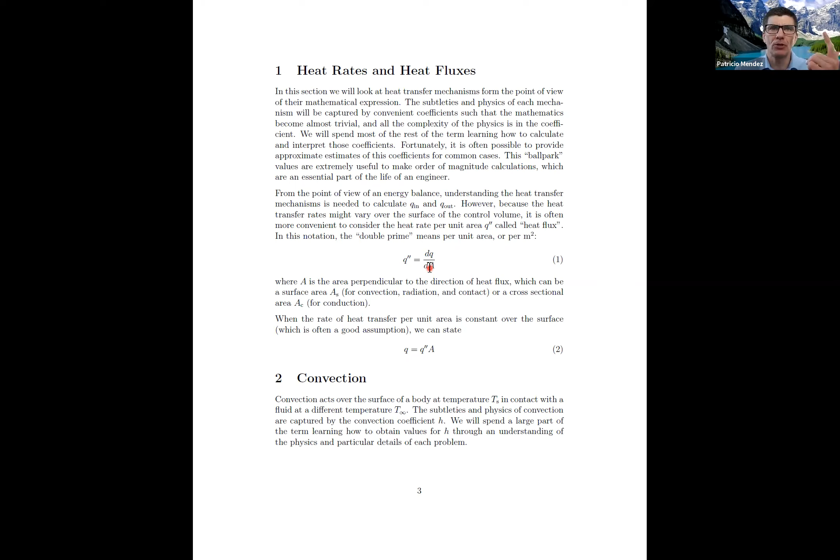Okay, so about heat transfer mechanisms. Here we go. As a quick review of what we saw on Monday, we said that in addition to the big Q, that is thermal energy in joules, and the small q, that is thermal energy in watts, an energy rate, we now have this small q double prime that is a heat flux, and the heat flux can go out of a surface, through a surface, right? And in that case, we call that surface A_s, a surface area, or it can go through a cross section of the body, through the inside. That is a case of conduction, and in that case we call it A_c.

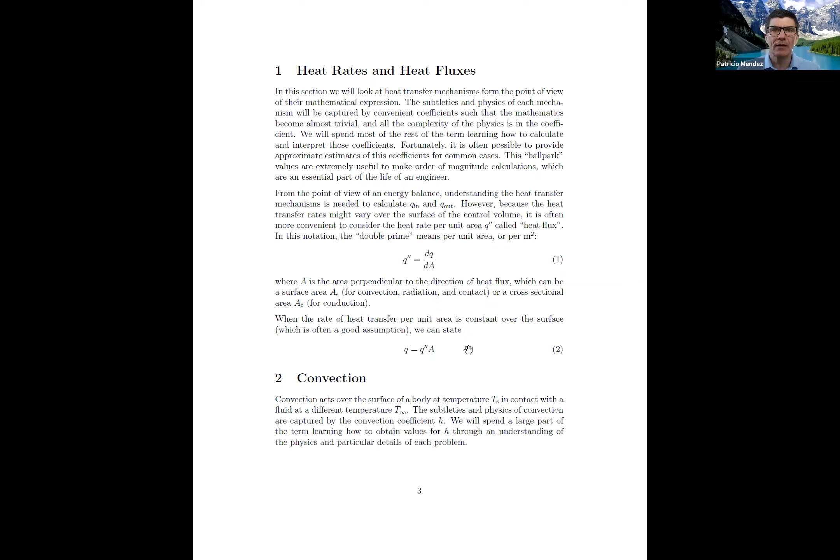And because this is a differential expression, to get a total amount of heat, we would need to integrate over the surface we care about. But for the most part in this class, not always, if we pick the control volume smartly over surfaces that have the same heat flux or the same temperature, very often we can say that the heat flux is constant over that surface, and the integral turns just into heat flux times area. Then we said, okay, what is the expression of heat flux for the case of convection?

And we came up with this formula that mathematically is essentially trivial, but it's extremely powerful. Just as energy balances look trivial, but last Monday during the seminar, it was not trivial at all. Now we see formulas that look trivial, but they summarize 200 years of research worldwide on heat transfer. And you're getting this crammed into 13 weeks, right? So don't be fooled by the simplicity. People thought about this very much before saying it.

So we said the key thing here is that the heat transferred by convection is proportional to the temperature difference between the surface temperature and the temperature of the fluid away from the surface. And this constant of proportionality is h, our heat transfer coefficient. Something interesting here, we are not saying exactly what the physics are for this to happen. We're just saying whatever the physics are, the heat transfer by convection is proportional to the temperature difference between surface and fluid. And the way I define it, it's always positive. So if it is a Q in, Q convection will be positive going in, and if it is a Q out, Q convection will be positive but going out.

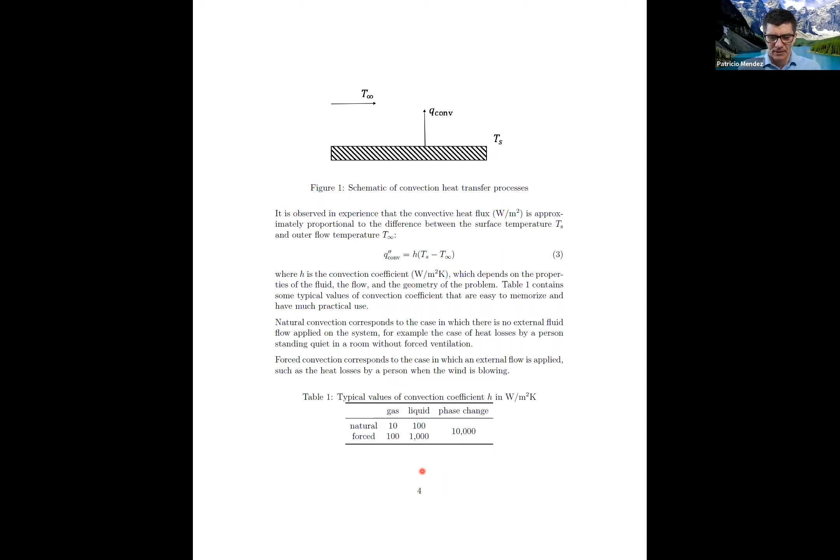We did a simple calculation that is a ridiculously simple calculation. Please be familiar with how to make this calculation, because this is what you're going to be doing. Next time you write an energy balance and you say, okay, what is Q in or what is Q out? And Q in or Q out might be by convection. And you will use this equation you saw here.

Then we saw radiation. That is a completely different physics. The equation of radiation is at the beginning of the birth of quantum mechanics. It's crazy stuff. But for us, we're not going to do quantum mechanics. We're just going to know that it has a formula in which the heat flux is epsilon sigma T surface to the 4 minus T surrounding to the 4. And for radiation, and only for radiation, we must use Kelvin.

For convection or conduction, we can use Kelvin, we can use Celsius, whatever we want. The result will not change. For radiation, it will change. And the reason is convection or conduction are always delta temperatures, relative changes in temperature. But in radiation, we have temperature to the 4, right? It's not a delta T to the 4. No, it's absolute temperature to the 4 of the surface and the surrounding temperature to the 4.

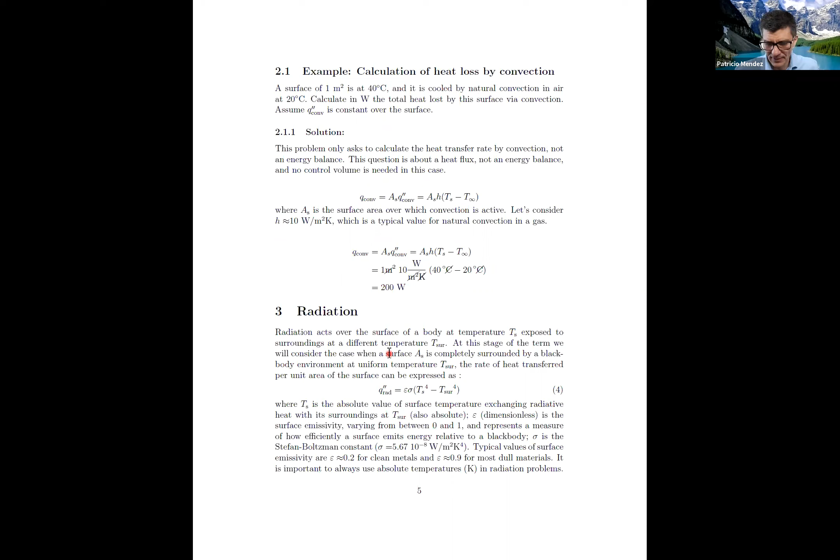You might need perhaps a refresher on this, or maybe you remember this and you think this is obvious. But the cool thing is that this exact equation we had before has this equivalent in which I'm expanding this difference of squares, and it ends up looking like this. This is exact. This is not an approximation.

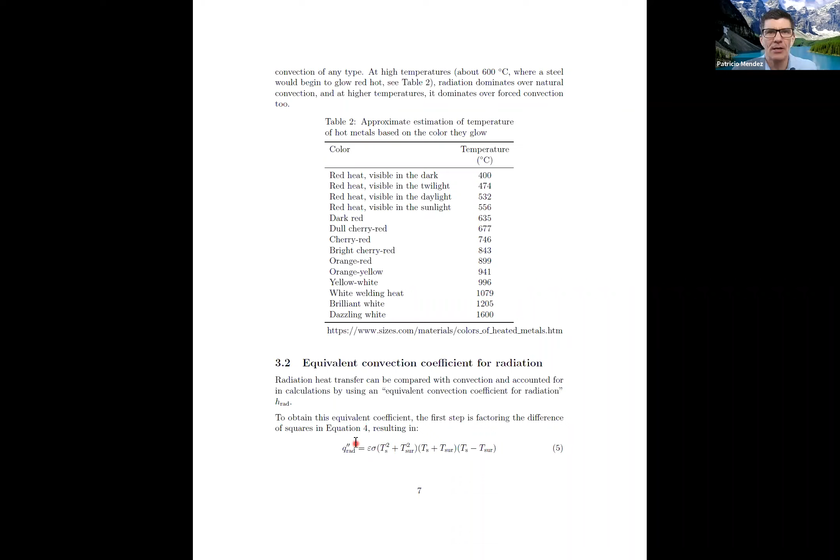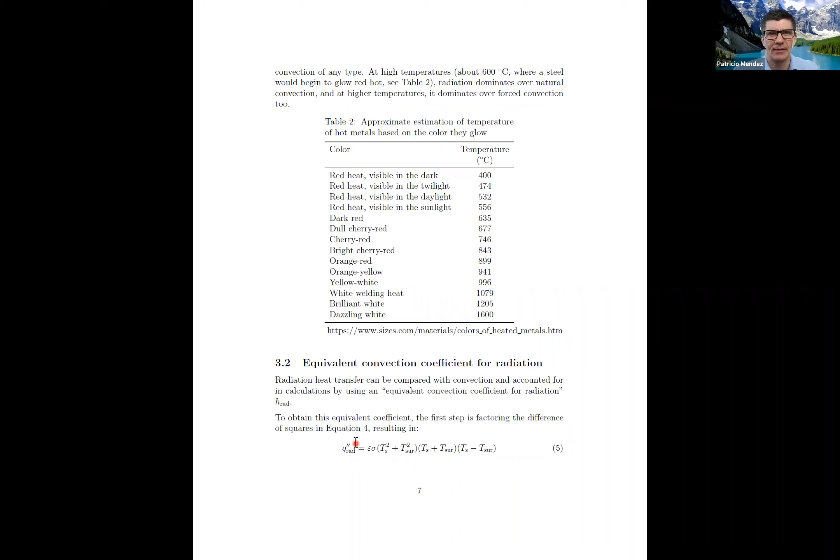What is interesting in this expansion is that it ends up having a term that is a delta T, temperature of the surface minus temperature of the surroundings. It has something in the front, but the fact that it has this delta T, saying no delta T, no heat flux by radiation, bigger delta T, bigger heat flux by radiation, means that it's somewhat similar to the equation we had seen for convection. The physics are nothing at all like it. But in the math, we see that there is some similarity in the expression.

And we can take that similarity to our advantage, because then we can say Q, the heat flux by radiation, we can call that whole chunk before the delta T H radiation. And that would be an equivalent convection coefficient for radiation. By equivalent, I mean it's not convection. Of course, it's not convection. But from the point of view of the math, it looks very much like convection. And the expression of this H radiation is this one that we can calculate having the epsilon, the sigma, the T of the surface and the T of the surroundings.

Of course, in convection, the convection coefficient is more or less constant with temperature. Not exactly constant. We'll see exactly how it varies later, but it doesn't vary very much. The equivalent convection coefficient for radiation depends very much on the temperature. Check it out. We have it here. So when we do this, it's mathematically exact, except that the H radiation changes quite a bit.

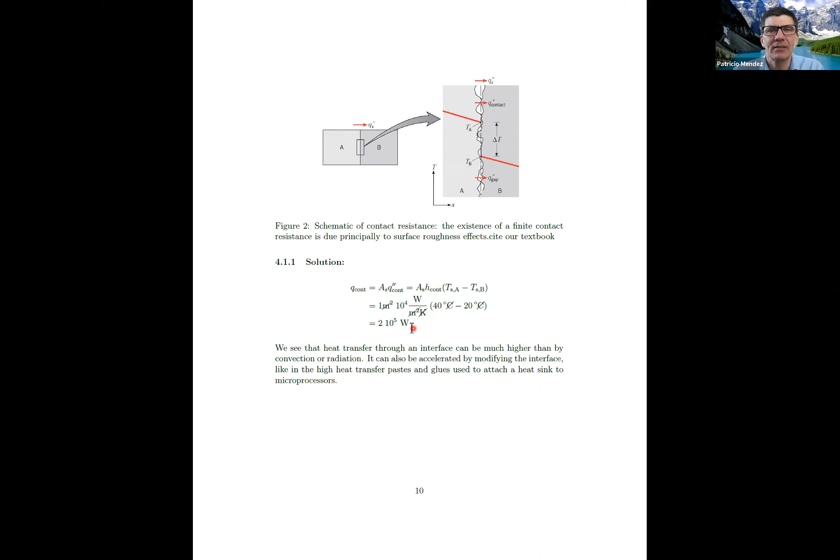If you remember when we did the heat exchange by radiation or by convection, we got things of the order of 100 watts. 200 watts for convection, about 100 watts for radiation. And then the heat flux under contact is 200,000, 1,000 times faster. Right? To keep in mind the order of magnitude of the things we're talking about. Exchange through surfaces is kind of slow, and exchange through these solid to solid contact interfaces tends to be quite high.

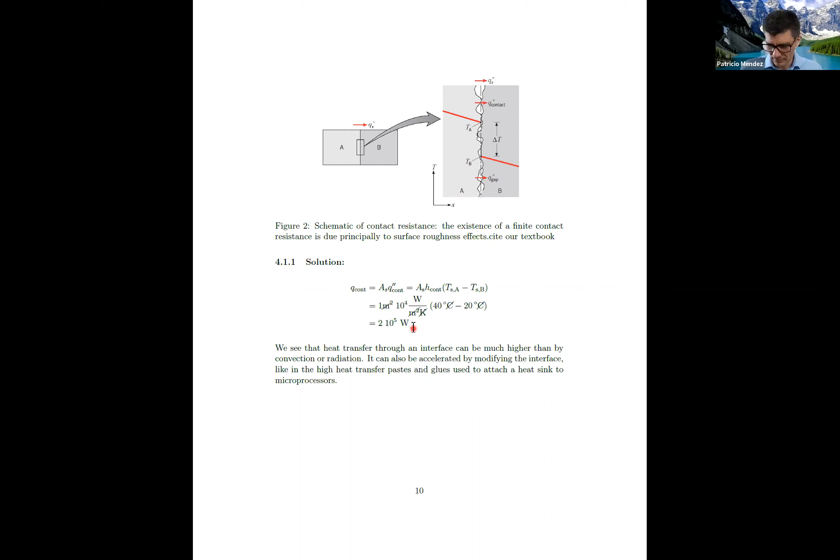All right, and now we get into something that will be the topic of the next few weeks. After seeing convection, radiation, and contact resistance, the first two I'm sure you heard before. Contact resistance, probably you haven't heard of, but has the same formulas. So we got those. We are going to talk about conduction. And conduction is a completely different animal,

because convection, radiation, contact resistance, all of those are associated with external surfaces, with surfaces going around the body. But conduction is inside a body. And the surfaces we're going to be talking about are cross-sectional surfaces, not outer surfaces. And people saw something empirically, which we call Fourier's law.

And what people saw is this: the heat transferred by conduction, let's say we have a wall such as this, one side of the wall is at high temperature, the other side of the wall is at lower temperature. The amount of heat transferred by conduction is proportional to the cross-sectional area. The cross-sectional area in this case is all the area of the wall because the heat is flowing across the wall.

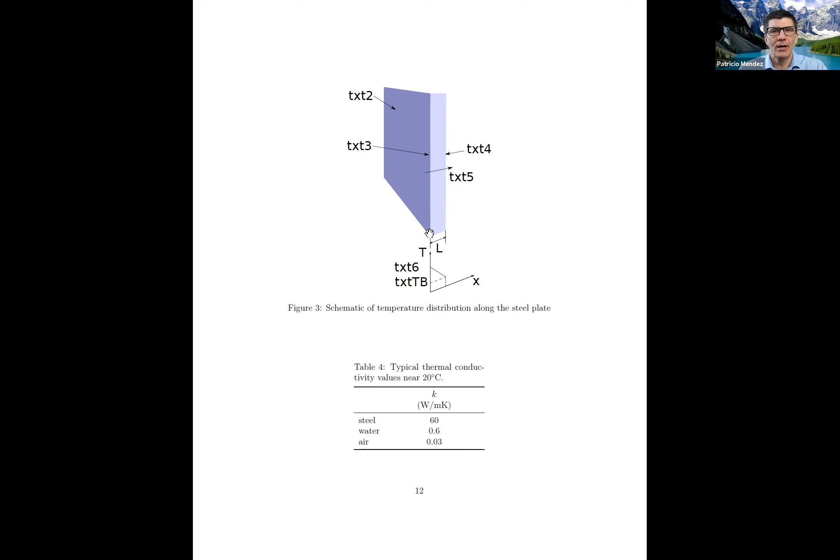And in addition, what people saw empirically is that this heat flux is inversely proportional to the thickness of the wall. Something you know, because a thicker jacket loses less heat to the winter air than a thinner jacket, right? L in this case is thickness. Higher L means lower heat losses by conduction. Much like everything else in this class, you knew this, but we are putting it together in a way in which we can make predictions that go way beyond intuition.

So let's see. The way we express this is we turn the delta T into a differential of temperature. We turn the thickness of the wall into something very thin, a differential of X. And the heat per unit area becomes a heat flux. And this equation, equation 10, turns into this expression here that is called Fourier's law.

Now we replace the proportional symbol with a proportionality constant. That is what we call the thermal conductivity coefficient, typically K. You're going to see in our book and pretty much all modern literature, people use K for that. All it means is the proportionality constant between the heat flux and what is called the gradient.

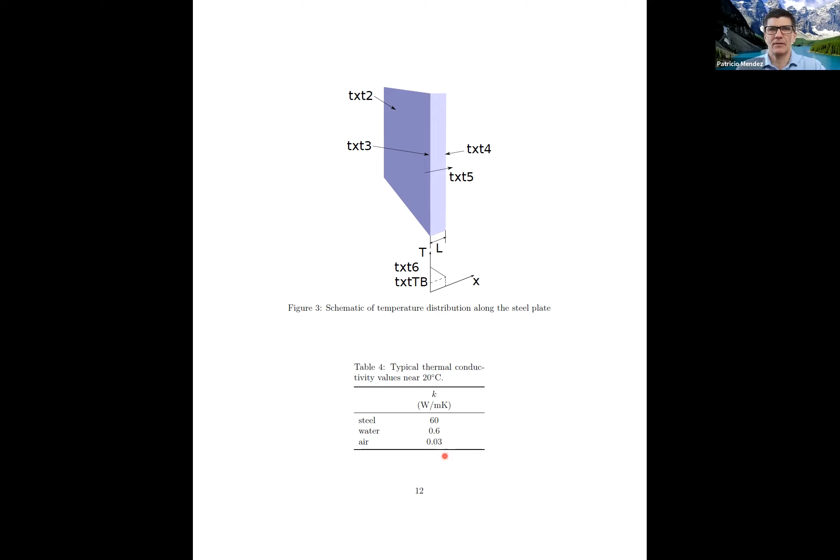And that's the reason down jackets are so good, because it's not that they have feathers, it's what they don't have. In between the fibers of the feathers, there's air, an awesome insulator. It's not the feathers, it's the air that is good for you, right? And that's why some animals in cold weather have hollow hairs, because inside the hole, what is there? Air. That is an amazing insulator.

Styrofoam. Why is styrofoam a good insulator? Not because of the polymer, but because of the air that is contained inside it. Awesome insulator.

So let's do a calculation of heat flux by conduction. So the heat flux by conduction, the total heat by conduction would be the cross-sectional area, assuming the heat flux is uniform over the area. You see I put AC because it's a cross-sectional area now, times heat flux. And you see that it has a subscript X,

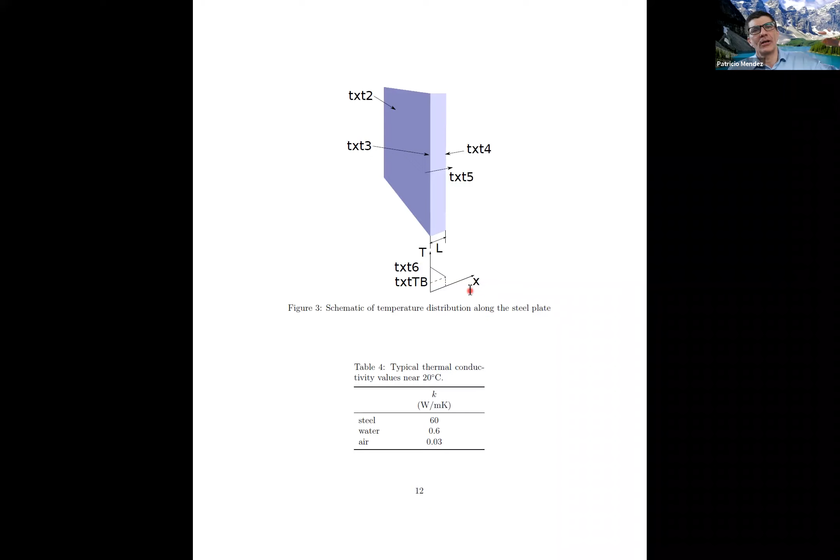and the reason is that, different from convection or radiation, conduction moves inside the body and can move in any of three directions, right? Can move in the X direction, Y direction, or Z direction. I'm going to discuss more about that in a minute. So in this case, what I'm saying is Q in the X direction. And why did I choose that? See, here in this schematic, we put the X direction as going across the wall in the direction of the heat flux.

Something I forgot to mention before, but if I go back to equation 11 here, we see something that I never liked, but I grew to accept it. And this can confuse people a lot. You see this minus sign? Why did they have to put a minus sign? Everybody does it, and I do. Let me tell you why I put a minus sign.

So let's pick an axis, X, right? Positive heat flux will be when heat moves in the X direction. Okay. Now, the gradient is a derivative, but see this, which is quite interesting. For the heat to move out in the X direction, what I need is that the temperature is hotter on this left wall than on the right wall. And here we have a schematic of the temperature gradient. And you get to see it's hot at X equals 0, and at X equals L is a little bit colder. This derivative, the delta T over delta X, is negative.

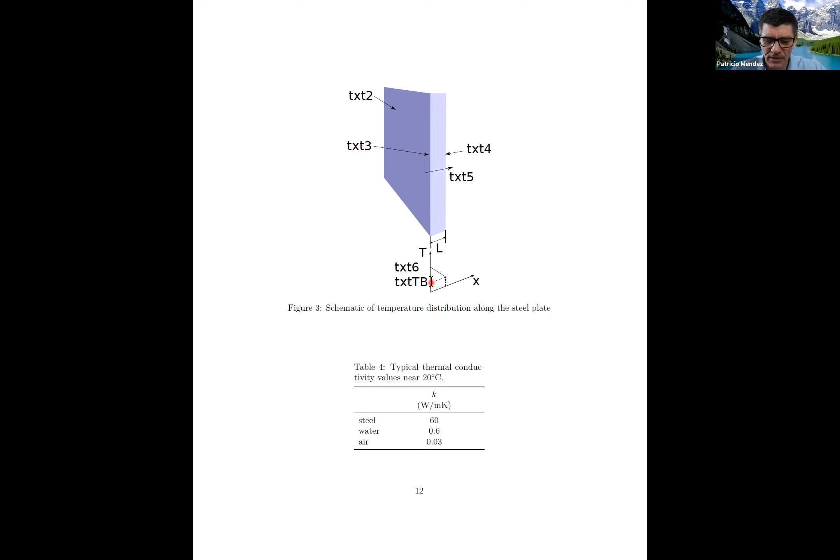So the heat moves in the direction in which the gradients are negative. So to say that my heat flux is positive in the X direction, I have to use a negative gradient. And for that reason we have this minus. So heat is positive in the direction in which the gradient is going down, is negative. That's why we have this minus sign here. And every time we put this equation in this differential form, we need to use the minus. Otherwise, we're going to get into trouble.

So let's do a calculation. Q conduction, we said, is cross-sectional area, the proportionality constant, that is thermal conductivity, the difference in temperatures between the two surfaces of the wall, and the thickness of the wall. If the wall was 1 meter square in cross-sectional area, steel has a thermal conductivity of 60, give or take, but is what we use as a reference. And the difference in temperature was 40 degrees in one end and 20 on the other end. And the thickness was 1 centimeter.

1 centimeter of steel is quite a bit. That's getting into armor. And what do we get? That the heat loss with that temperature difference is of the order of 10 to the 5 watts. 1.2 times 10 to the 5. So it's 120,000 watts. That's a lot. That's a lot. So what we get to see here is that the heat transfer by conduction, at least in metals, is very fast too.

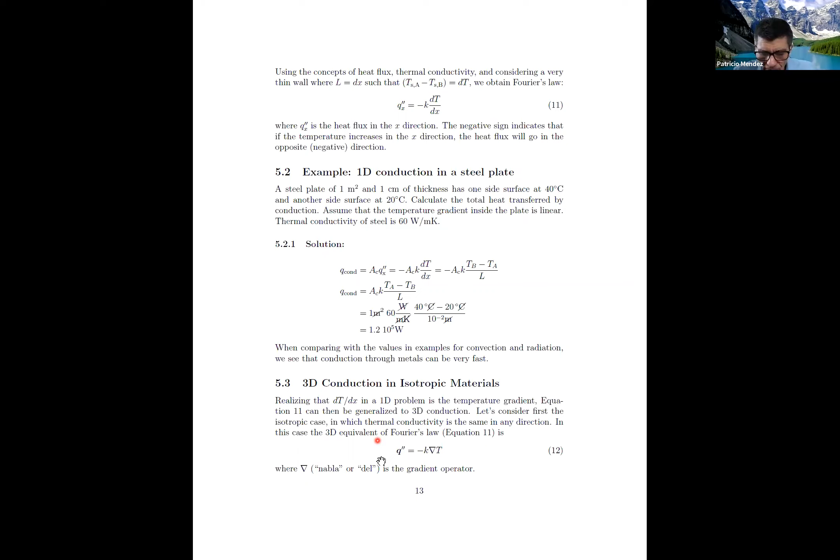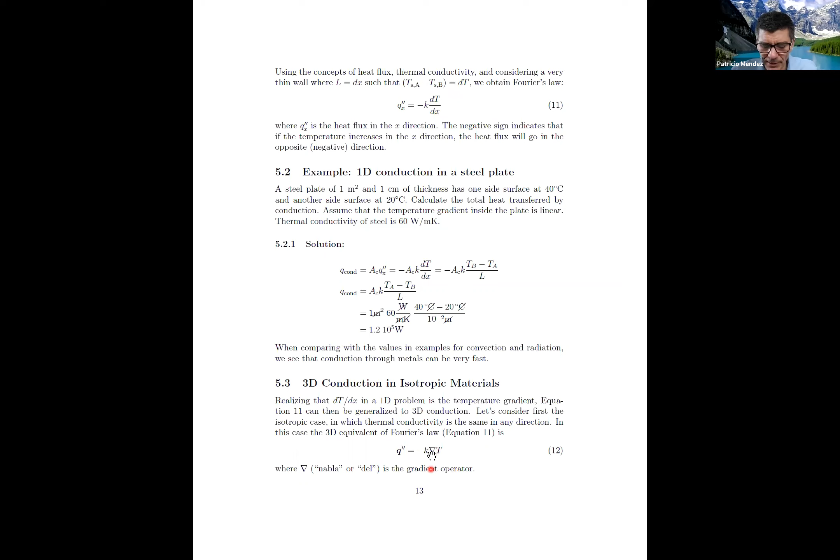And the gradient here that looks just like a derivative becomes this gradient operator. You might have seen it in your multivariate calculus, right? This operator, the nabla operator or the del operator. And I'm explaining it here. So, okay. So the gradient is the derivative in the x direction times the unit vector in x, same with y, and same with z.

You might or might not remember this curly d, right? This backward 6 means partial differential, partial derivative. If I have only one variable, x, for example, I have a total derivative. That's why it has the upright d. But if we have many variables, like in multivariate calculus, x, y, and z, then we use the partial symbol.

Why am I getting into this? I do love it, but that's not the reason. The reason I'm getting into this is because if we talk about cylinders, like tubes in a heat exchanger, or spheres, which is a common geometry too, as we discussed in our example in the seminar on Monday, we start to have some sort of 3D geometry. Not to mention that if you're going to be using computers, now you can have any type of geometry you want, and you better be able to calculate heat moving in different directions.

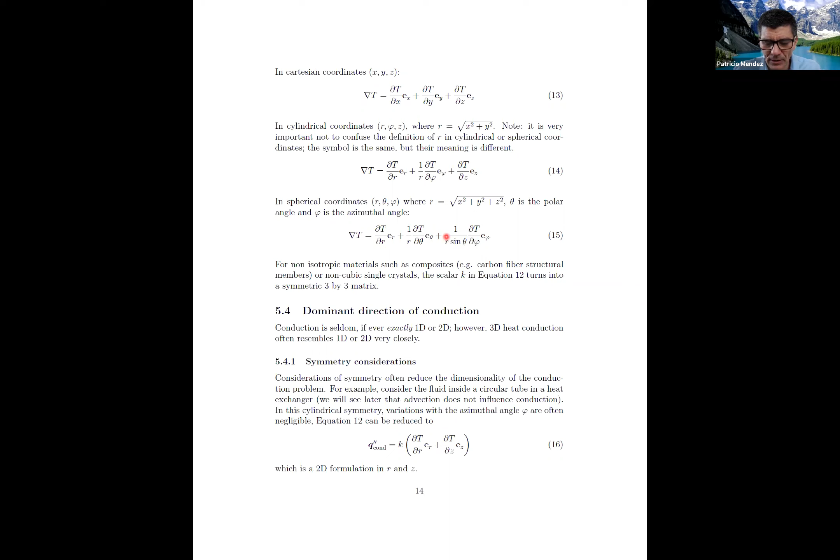And in the case of a sphere, when we have what we call spherical symmetry, we have these azimuthal and polar angles, and there is no dependence on those angles. So this term can go away. This other term associated with the angle can go away. And we end up with only a derivative in radius. And here I'm catching a mistake of mine: this should have been the upright d. I'm gonna need to update this note, because now the problem is mathematically 1D but physically 3D. Physically it's 3D because it's a sphere, but mathematically it's 1D because of the three coordinates, two don't matter and only one matters. And life is a lot simpler that way.

Let's stop here, and I'm going to finish this unit discussing geometry considerations and a few examples on Friday.